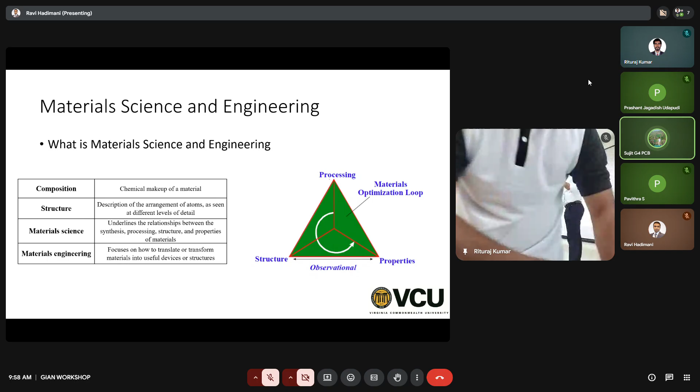That's possible because of different properties - not just mechanical, but also electrical. Your transformers and adapters, when you plug them in, have iron cores, and so many fans have iron inductors - those are electrical steels. There is structural steel and electrical steel. They may have the same composition, but their electrical and structural properties will be different depending on the crystal structure, morphology, and atomic structure. You can have the same composition in different crystal structures - that is the structure.

We have to first come up with the right composition, then the right structure, and then using the relationship between structure and chemical composition, you design the process - how to make this material. That is processing. When you process with the right structure, you get the right properties. This is called material optimization, or material engineering - basically taking the right composition, right structure, and the right process to get the right property. That is materials engineering. Usually wherever you find materials engineering branches or fields of study, it's called material science and engineering, because there's a lot of engineering to it as well.

So we will be looking not just at composition, but also structure, in order to get the right property. Chemical composition - you probably think that is the main determinant of property, but it's not just that, it's also the structure, crystal structure, morphology, and how you process it changes the crystal structure. Processing usually doesn't affect the composition that much, but processing affects the crystal structure a lot.

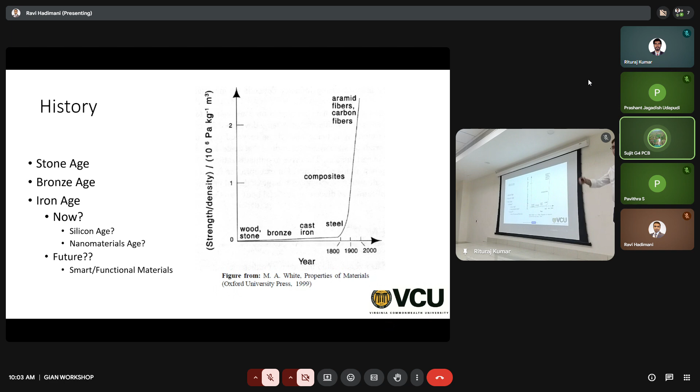So if you classify the materials, they are generally classified into four categories: metals, semiconductors, ceramics, and polymers. Metals are quite widely used for engineering materials, semiconductors for electronics, ceramics for high temperature applications, and also some functional materials are ceramics, like PZT.

Have you heard of piezoelectric materials? Do you know which is the most common piezoelectric material? PVDF is a polymer, yes. And the most commonly used one is called PZT. P stands for lead, Z is zirconium, T is titanium, so it's lead zirconate titanate. So it's a ceramic.

And then we have polymers, that is polypropylene, PDMS, PVDF, some cellulose-based polymers, hydrogels, and so on. And then a new combination of all of these can be made into composites. So if you need a certain property of ceramic along with metal, but you need some flexibility, you can combine all these to make a composite material, a combination of all the materials.

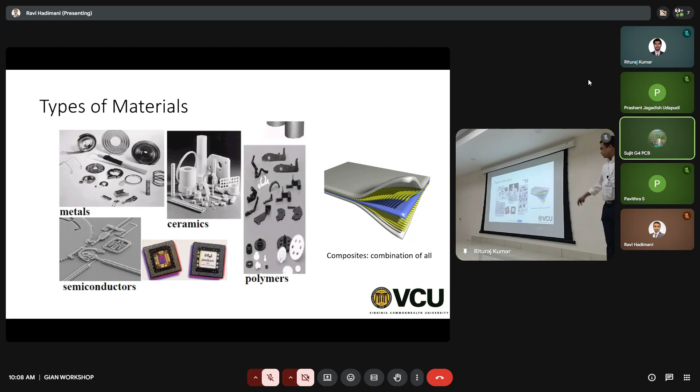So now, scale of things. In material science, we mainly nowadays operate at the macro scale, then now we are doing the nano scale. So here is the natural materials in different scales, here are the artificial ones, and at nano scale we operate nowadays.

So, do you know your laptop? If it has an i7, Pentium, Intel i7, how many number of transistors it has?

It's about 100 billion. The new i7 processor will have 100 billion in a single inch by inch square. 100 billion is a large number. You can't, it's hard to fathom, right?

We don't deal with such numbers in day-to-day life. Well, what that means is the distance between the source and the gate in the transistor is close to 2 nanometers. So that's the level of engineering we are doing right now.

Okay? So 2 nanometers we have to make, we have to put an electrode, a metallic structure every 2 nanometers to make this number of transistors. Again, for how many of you have electrical background?

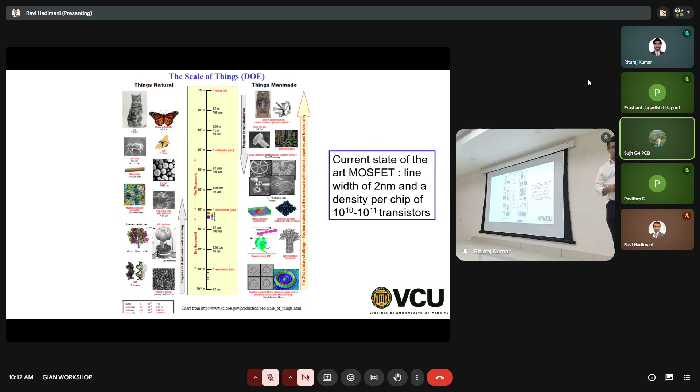So now let's go to smart materials. So what are smart materials? Or functional materials? Okay, it's interchangeable. When we say smart materials, we mean functional materials. What are functional materials?

Basically, when there is a coupling between 2 domains, that is, you apply stress and you measure electrical stuff, which is voltage or electric field or current. You apply stress and measure thermal properties, right? So there is a coupling between mechanical, electrical, thermal, optical, magnetic. When you change one property and get change in the other property, that's what we call smart function, right? So that is the coupling, basically.

And of course, if you actually think about it, most materials can be made into smart materials. Because if you change the structure of the material, or if you apply a force, you're basically applying stresses to the crystal structure where you are bringing atoms closer in the crystal structure, right? You are changing the lattice parameters of the crystal structure. And when you do that, the electric field also changes in the crystal, which results in some variation in the electric property.

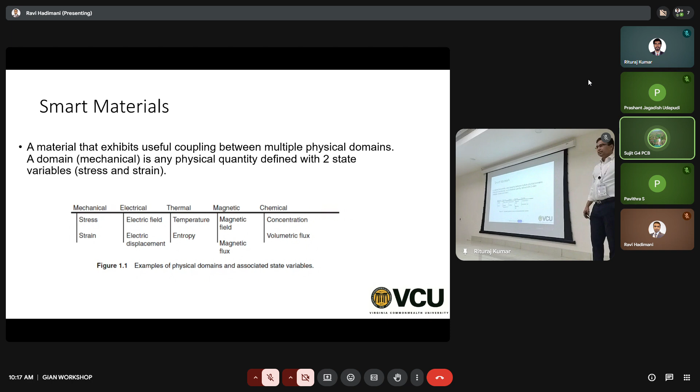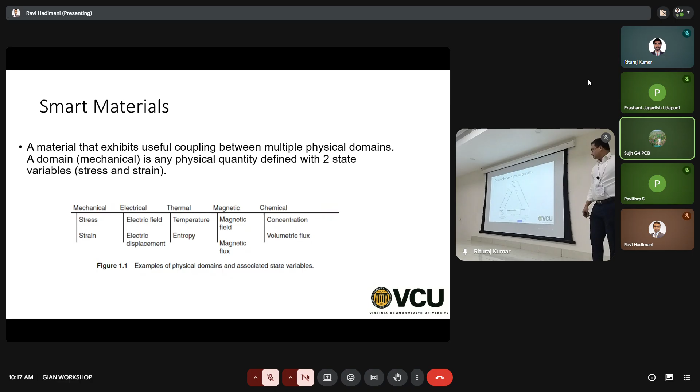It's easy to apply stress, and also easy to apply temperature. And now you can apply electric current, easy to apply because we generate it with circuitry. So that's the coupling between mechanical, electrical, and thermal. And if you have magnetic, optical, chemical, it becomes just complex.

Here is a diagram I just grabbed and drew. It existed already, I thought it would represent this nicely.

So if it is mechanical and electrical, you get piezoelectric. Direct piezoelectric: if you apply stress and measure current or voltage, that is the direct piezoelectric effect. But if you apply voltage and see change in the dimension of the material, that is the converse or inverse piezoelectric effect. You apply electric field to get rise in temperature of a material, it's called... And if you apply temperature to a material and see change in current or voltage, that is the piezoelectric effect.

Similarly, temperature and mechanical stress: if you apply temperature, the material expands or contracts, that is coefficient of thermal expansion. I don't know why these two arrows go the same way—if it's different, if you apply mechanical stress, you get temperature change. These are caloric materials, elastocaloric. So you apply stress and get a change in temperature.

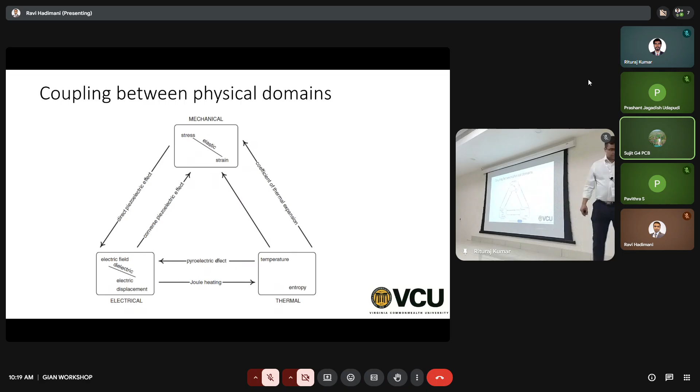So here are some examples: piezoelectric material, thermoelectric material, shape memory alloys, magnetoelastic materials, magnetocaloric materials. Whenever there is 'magneto', it's magnetic field. You change magnetic field and get rheology changing the viscosity. And 'elastic' is changing the chemical, changing the Young's modulus or mechanical properties. 'Caloric' is changing temperature—this is magnetocaloric.

Electrocaloric is you apply current and get changing temperature. Barocaloric, apply pressure, you get changing temperature. So elastocaloric and barocaloric—elasto means change in stress, baro is change in pressure. Stress and pressure have the same units, but it's the way you apply it. So some are called barocaloric materials, some are called elastocaloric.

Then there are thermoelectric materials, thermochromic materials—you apply temperature, you get a change in color, and that is because its optical properties change. Think of it, it's all like magic. If I show somebody a red polymer or metal by holding it at the bottom, then hold it on top and provide my body temperature, when it crosses 37 degrees centigrade, it changes its color.

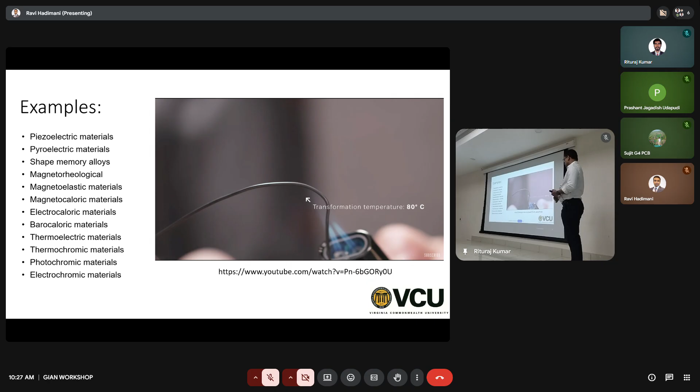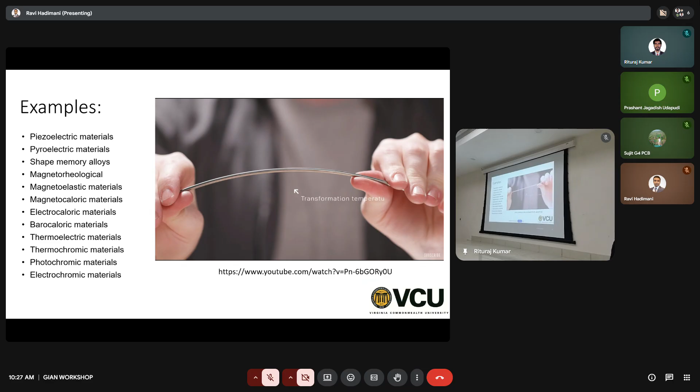So shape memory alloy.

It remembers its shape. What that means, what he showed there, I don't know if everybody understood it. Take this shape memory alloy, SMA, heat it to 80 degrees centigrade, which is its transition temperature, and then convert it into a certain shape. When you are at 500 degrees, you make it into a certain shape and then you quench it.

So when you quench it, it becomes room temperature. Now you remove its shape, you stretch it, and it becomes a thin wire. Now if you go and heat it again, it will go back to its original shape. So that means when it's at 500 degrees, you can make a complex structure, even a Taj Mahal wire frame. Now you quench it and remove all that shape. You make it into a wire again, put it on a board and heat it again, it goes back to the Taj Mahal shape. That is the shape memory we're talking about.

But thinking of the actual device, right, or a sensor is also some sort of semiconductor device, but just a metal wire can act as a sensor or an actuator.

So now, do you know what nitinol is chemically? Yeah, it's in the name, nitinol, right? So just imagine those three elements came together and made this really cool alloy. How many more such materials are hidden in these 118 elements? We barely know many of these elements. We just operate here because those are more abundant. As you go down here, they are there on the Earth's crust, but the usage has been limited.

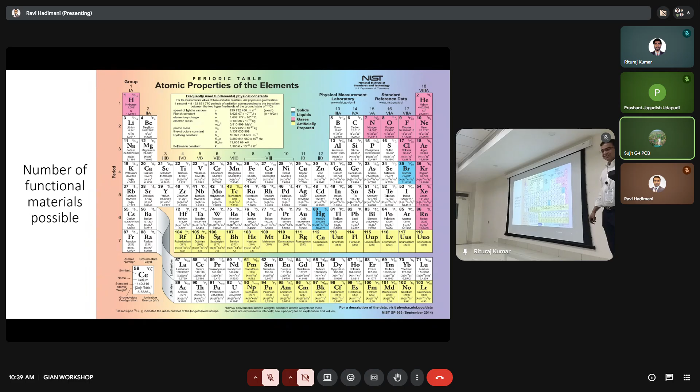Okay, so that is the composition, that is the chemistry, right? The shape memory is not just chemistry. It's a little chemistry, but also structure. Now let's go to pure structure.

Are you familiar with polymorphism? Basically, it's the ability of the same chemical composition to occur in multiple crystal structures. For example, the iron system, that is iron and carbon, can occur in BCC, FCC, as well as another BCC that is different from the first BCC. This is called delta iron, gamma iron, and alpha iron. This exists at very high, medium, and low temperatures.

So how many of you are familiar with the phase diagram, the iron-carbon phase diagram? If you study material science, you have to know that. If you understand the iron-carbon phase diagram, you will understand how amazing, how cool, material science is.

Iron can exist in different crystal structures, and when they are in mixed phase, they form different crystal structures. Then you alloy them, because when you add carbon, you're basically putting these carbon atoms into interstitial sites of the crystal structure, changing its strength.

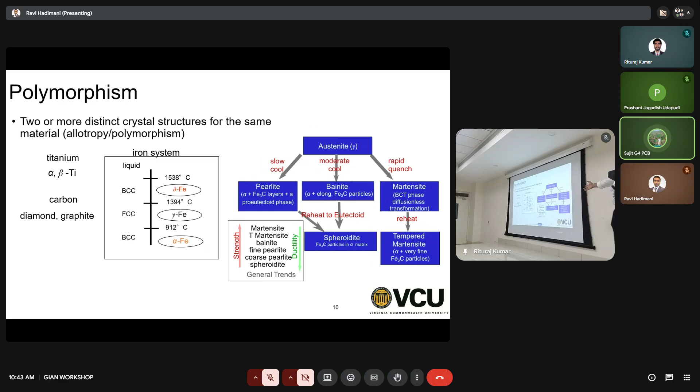These are all different forms of steel. The ductility reduces as you go down, and the strength increases as you go up. So you can engineer a material specific for your application. Swords need a certain strength, bridges need a certain strength, and rail tracks need a certain strength. You can change it easily by varying the carbon content.

You're talking about only 6.7% carbon content. This is the binary phase diagram - here it's all liquid, here it's liquid plus solid, here it's solid with two different forms. So it's mixed phase, single phase, mixed phase, depending on how much carbon you put in. You can also do thermal treatment - you quench it suddenly to lock in this structure. There's so much you can do, and that's how we've ended up with so many varieties of steel.

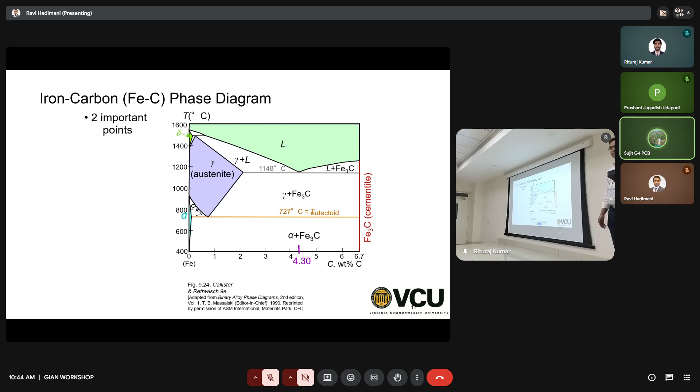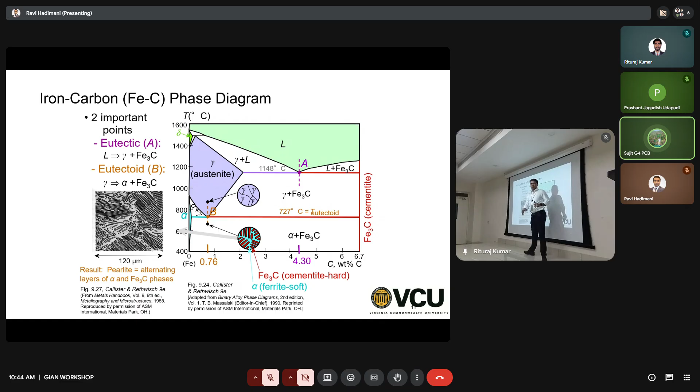This is pearlite structure, a very popular structure. That was the binary phase diagram of iron and carbon. But if you do ternary, with three elements like copper, aluminum, and silver, it becomes complex. Then there's quaternary with four materials, even more complex.

There's something called high entropy alloys, with five or more elements. You're increasing complexity but getting really cool desired properties that you can't get with one or two elements. There's a lot to explore there - it's what we call wild, wild west, even unexplored. There's so much you can do.

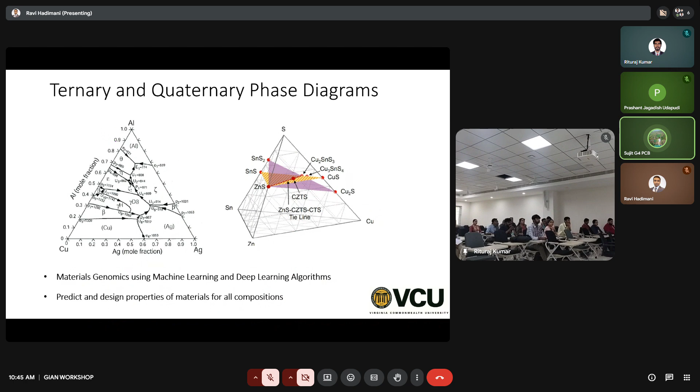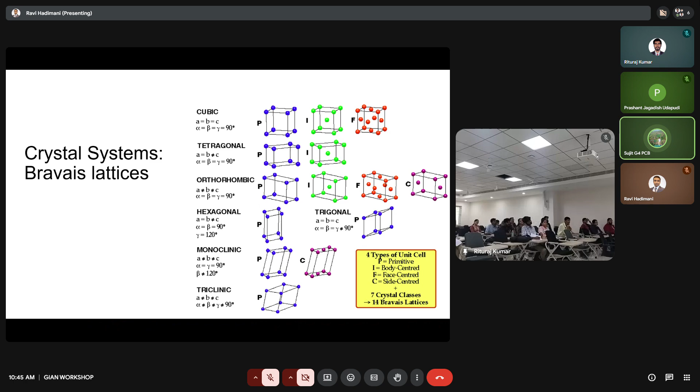Now let's come to crystal structures - basically how atoms are arranged. These are different types of crystal structures. If you have cubic, you have a nice symmetry and can have all these different arrangements, which you've probably studied before. The link here works only for those who bought the Callister book, so you could explore different types there, but ignore that slide.

Now you can calculate the theoretical density if you know the crystal structure. Density is mass by volume. If you know the crystal structure, you know the lattice parameter, which is basically this one dimension. If you know the structure and the lattice parameter, you can calculate the volume. And if you know how many atoms are there and their atomic weight, you know their mass.

This is number of atoms. For BCC, it's 8 corner atoms divided by 8, multiplied by 8, plus one body center, giving you 2 atoms in BCC. FCC we have 4, and simple cubic we have 1. This is the atomic weight - 52 is for chromium - divided by A cubed, that's the volume, and divided by Avogadro's number, this will give you theoretical density.

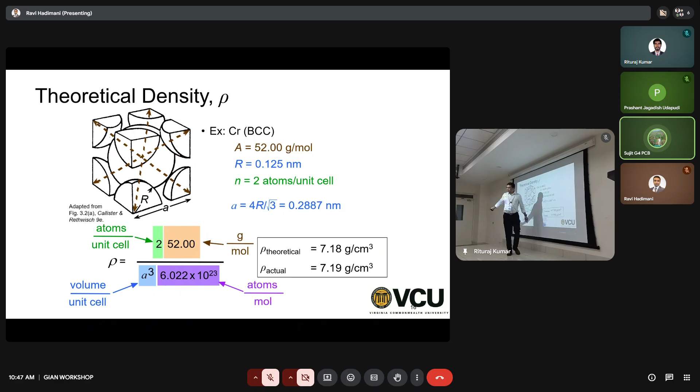So now my question is, how will you determine A and the crystal structure? How do you know for a certain material - if I give you a piece of metal and say calculate its theoretical density, and you don't know anything - what will you do? You need those parameters, A and crystal structure type like BCC. How do you get that?

Any guess? Elementary techniques are there, like for example from XRD we can get this. So you get lattice parameter from XRD and you know the crystal type, BCC, by XRD. XRD is X-ray diffractometer. Are you familiar with XRD? I know PhD students are, they do it day in and day out.

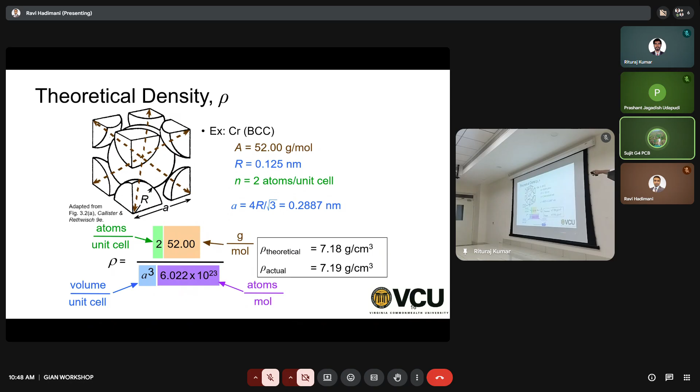XRD is a technique where you can determine what type of crystal structure and what are the distances between atomic layers. So that is XRD, X-ray diffractometer, and it is governed by a principal law called Bragg's law.

2D sine theta equals n lambda. Lambda is the wavelength.

So what happens is when you put X-rays on a material, X-rays go and hit the atoms and get deflected. Some X-rays hit the first atom and go there, and some X-rays hit the second and go, and they're sensed by the detector. The detector is basically a sensor that senses X-ray. There is a difference in the path when the detector senses the X-ray, and that distance gives you the lattice parameter. That is your D.

And n lambda, usually n is 1 because you get most of the deflections within 2 layers. Sine theta is theta at which this is the angle of incidence. That is the theta. Lambda is the wavelength of the X-ray. So this will give you D, the spacings.

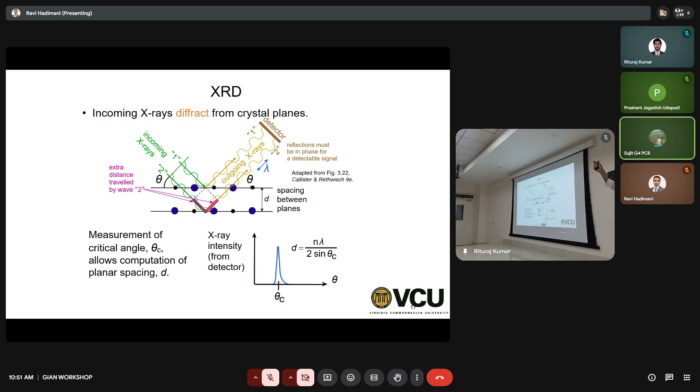And the patterns here will tell you whether it's a BCC or FCC or just a simple cubic. Once you know what type of crystal it is, what is your lattice parameter, you can calculate its theoretical density. You can also do a lot of other calculations. You can even find out its crystalline size or its grain size. You can even calculate if there is any residual stress inside.

Okay, this is how it looks like. It's so clean and neat. This is for BCC. If the lattice crystal structure is really complex, like monoclinic, then you don't get this thing of peaks, you get multiples of those peaks. Here each peak represents a plane.

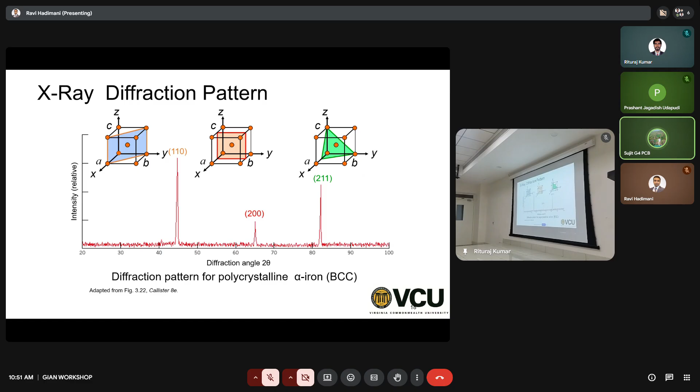And if it's an amorphous material, if it's not crystalline, the XRD result will show you no patterns like this, no peaks like this, because when the X-ray is detected, there is no pattern, there are no lines, no layers of patterns, so it doesn't get that D parameter. You have to have that D parameter in order to get constructive interference for the detector to see these peaks.

So here is quartz. Quartz is orthorhombic, or monoclinic, and cristobalite is another form. This is the same chemical compound, SiO2, nothing but sand. Your sand can exist as glass, or as quartz that can go into your watch as a piezoelectric material, or as cristobalite, which is not piezoelectric, occurs in a completely different crystal structure whose properties will be very different than glass or quartz. So that tells you how just changing the crystal structure will give you different properties altogether.

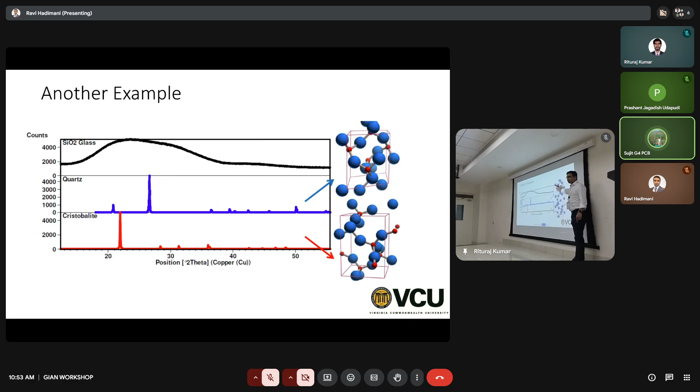Right, how are we doing? I have 7 more minutes before you can take off for break. I want to see, okay, I think I should be able to do that.

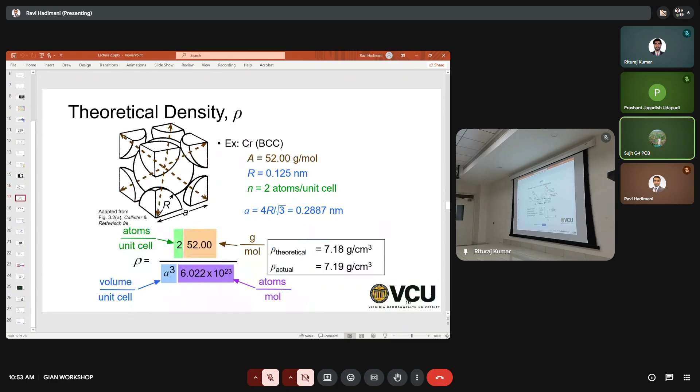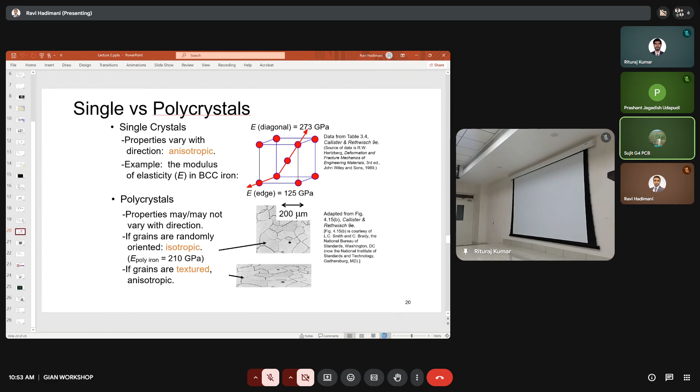So now you looked at crystals and how crystals affect properties, and you know how crystalline parameters, the parameters from the crystal, can determine the density, can determine its electric property, magnetic property, strength, thermal property, optical property, and so on and so forth. Now that's the atomic level arrangement, we finished the composition, now atomic level.

Now we have to do the engineering part, the processing part. So when you melt a material, let's look at a simple example of iron. When you take iron and melt it at 1600, 1650 degrees centigrade, it becomes liquid. When you start to cool it, what happens?

It first becomes the delta phase, gamma phase, and alpha phase, cooling down to different crystal structures. But do you think it will all become one crystal structure, and all the crystals are aligned and have one nice single crystal?

No, right? Because there are some impurities. It's impossible to have a perfectly pure material. Many small impurities will disrupt the crystal orientation and they will grow in different forms, and you see grains.

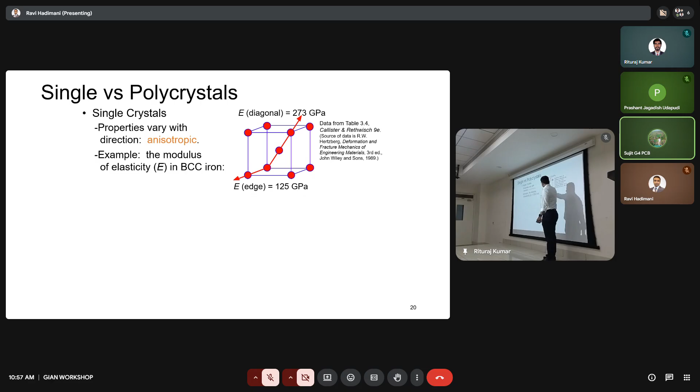So if you have a single crystal, what do you think will happen to the properties? If you measure properties, so if you pull this tensile, if you measure tensile strength along this direction, versus if you pull it along this corner to this corner - which one will stretch higher? Yeah, so diagonal or this one, again it depends on materials, but they will have different properties in different directions. So that's one example of modulus of elasticity.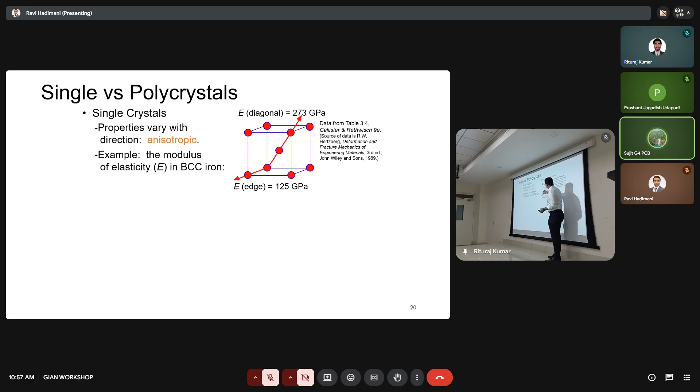But same is true for electrical. If you apply a voltage from this corner to this corner, the conductivity will probably be higher here because the distance, the bond length, will be smaller here. Likewise, bond length, bond energy will determine a lot of material properties. And by changing the crystal, you can get different material properties. So you will have a different material property along the diagonal than the side. Okay, so that is anisotropy - you get different properties in different directions.

So if it's a single crystal, then yes, everything is well aligned. So if you take a material and you measure tensile strength along its shorter dimension, you'll get one property, but if you measure along the longer axis, you'll get another property in a single crystal. That's because they're all aligned in one direction. So that is single crystal.

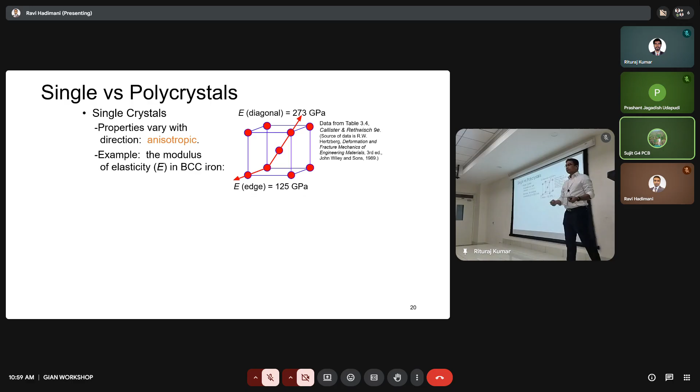But it's impossible to get a single crystal in a furnace at industrial scale. So you get all these different crystals oriented in different directions. So what happens if you take all these small grains, each grain being a single crystal material? Have you seen these grains in any of the examples I gave, like in pipes? You can see sometimes on these large metallic pipes, especially if the metal is polished, large geometric features come on the surface. So those are grains, nothing but grains. In those grains, each grain is a single crystal. And some materials can have large single crystals at a given processing parameter, and some materials can have smaller ones.

So in these polycrystalline materials, when grains are all oriented randomly, what happens to your anisotropy? There is no anisotropy, because everything combines together. So wherever you measure, your strength, Young's modulus, or the conductivity will all be the same. So polycrystalline samples are not anisotropic - there is no anisotropy in polycrystalline samples.

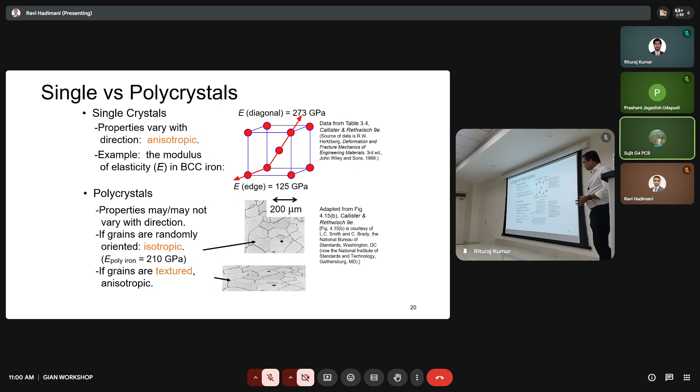So this is when you take an ingot - when you pour a liquid and then take the ingot and cut it open, these are the grains. That's how the grains are. Each grain is a single crystal, and they're all randomly oriented.

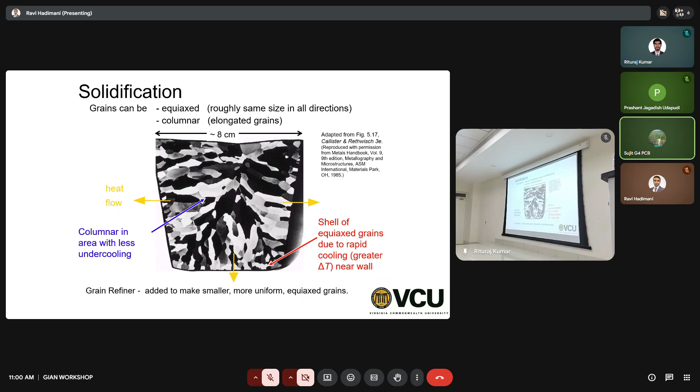So now the last engineering part. I talked about how composition can determine the properties, how the atomic arrangement can determine the properties, and the processing parameter of single crystal versus polycrystalline. The other engineering method, or engineering of materials, is engineering the defects in the material. And as I said, it's impossible to make a material that's perfectly pure, so you will invariably introduce lots of defects in a polycrystalline or crystalline material.

So when the atoms are aligning, sometimes there might be a missing atom. Sometimes when it is aligning, it might align in a slightly different direction. So these are all different defects. The types of defects are vacancy atoms, interstitial atoms, substitutional atoms, and dislocations. These are point defects. Dislocations are line defects. Does anyone know what the other defect is? There's another type of defect.

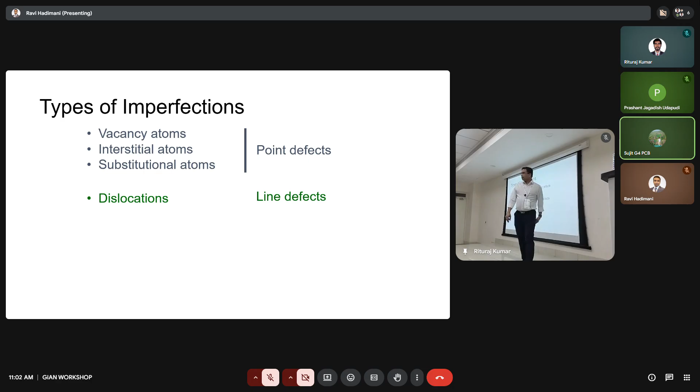Now, what's the next point? Line, surface, right? Yeah. So grain boundaries, twin boundaries come here as well - grain boundary area defects.

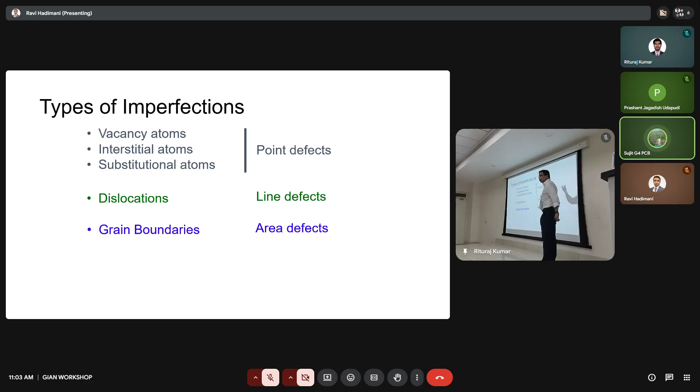So these are defects, but actually you can use these defects to your advantage. For example, you can use substitutional defects - the way we make steels is nothing but substitutional defect. How do you think the carbon goes into the iron crystal? Basically you're putting an impurity in the crystal and changing the strength, the hardness, and so on and so forth. You can use these defects to your advantage, not just in tuning the mechanical strength, but also in magnetics and electrical materials, where they play a very important role, especially dislocations.

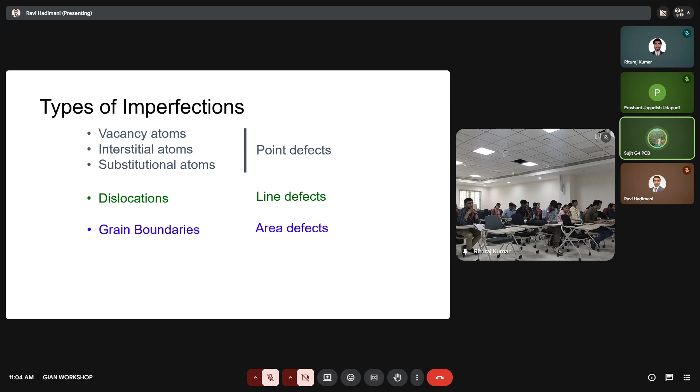We can control the percentage or density of dislocations and point defects to our advantage, tuning the properties of materials by controlling the defects. The last one, grain boundaries, is used for catalysts.

For catalysis, you create grain boundaries such that you create a lot of surface area. That's what makes a catalyst. I think we are out of time, but I'll take one more minute to show the difference between pure metal and substitutional alloy.

Substitutional alloy is basically changing one of the atoms with another atom, usually with similar atomic radii. For example, nickel, cobalt, iron all have similar radii, and you can change this without changing anything. When you take an XRD of a substitutional alloy, you don't see any difference.

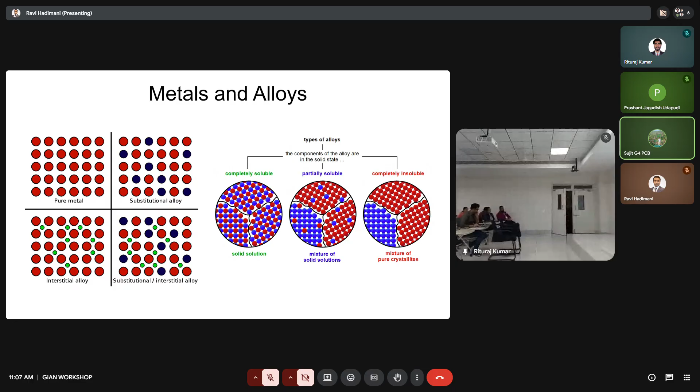These two might have the same crystal structure, but this will have a different one. The XRD pattern will have one peak set for this, a mix of peaks for this, and different peaks for this since it's completely insoluble.

And that's the dislocation. I'll quickly show you this video and then we will take off. That's the end.

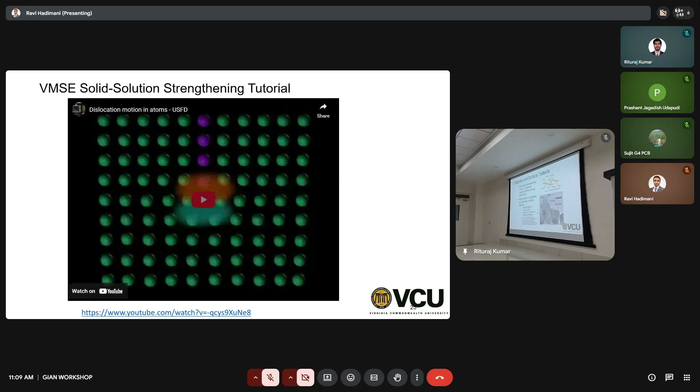You relieve stress by moving the dislocations through thermal treatment. Dislocations can annihilate one another, as they have directions. When you increase the temperature, two dissimilar dislocations can come together and completely disappear, decreasing the dislocation density.

When you decrease the dislocation density, you're basically increasing the slip length, which means you can increase plastic deformation, which is nothing but increasing ductility. When you anneal a material, you are removing dislocations and improving the ductility. That's very simple.

It's quite widely used, where you can control the dislocation density to a point where you get the required property you want, not just strength. You can also do that for electrical property, magnetic property, optical property, and so on. I hope you got an idea of how composition works.

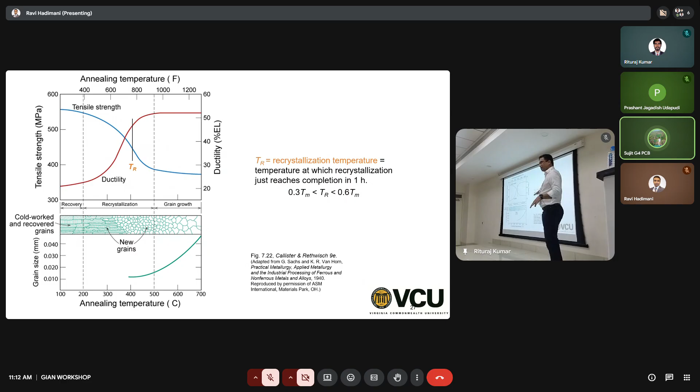Now we'll go into specific functional materials. This is the foundation of material science, and with these concepts, we will change the properties of functional material. I think that's the end of it. Sorry it took a little longer because we started a little late.

So we'll take a break for you guys. Is it tea time? Yeah, what is it, a break? Okay.

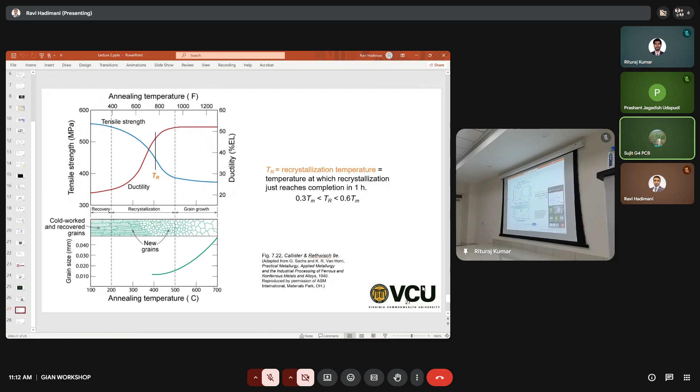Thank you. So should I just quit the meeting? Yes. No.